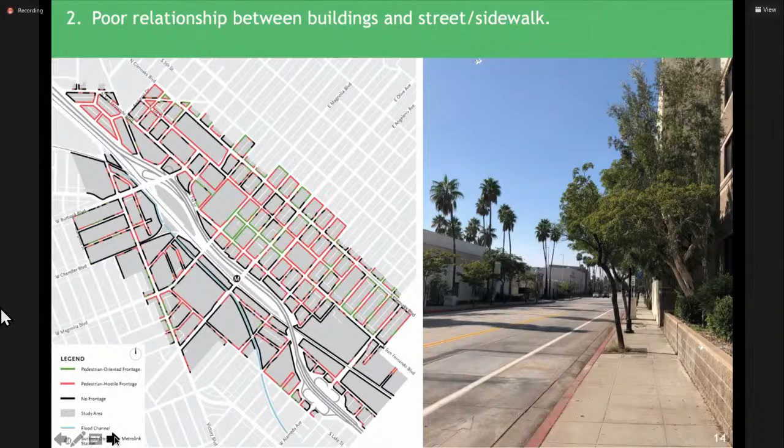There is a poor relationship generally between buildings and the street and sidewalk in places downtown. In green, you can see the few pedestrian-oriented frontages where buildings relate properly to streets and sidewalks, mostly along San Fernando Boulevard in the core of the current downtown. In red are pedestrian hostile frontages, mostly buildings that are very long and blank in relation to the street and sidewalk. In black are areas of downtown with no building frontages at all, mainly parking lots. You can see how much of this frontage in downtown is either black or red.

There is scarce open space and missing street trees. There's a deficiency in parks and beautiful streetscapes, as I've said before. There are robust parks to the north and to the west. There's only one coherent pedestrian-oriented streetscape of mature street trees, and that's along San Fernando Boulevard. All the others are either incomplete or not there at all.

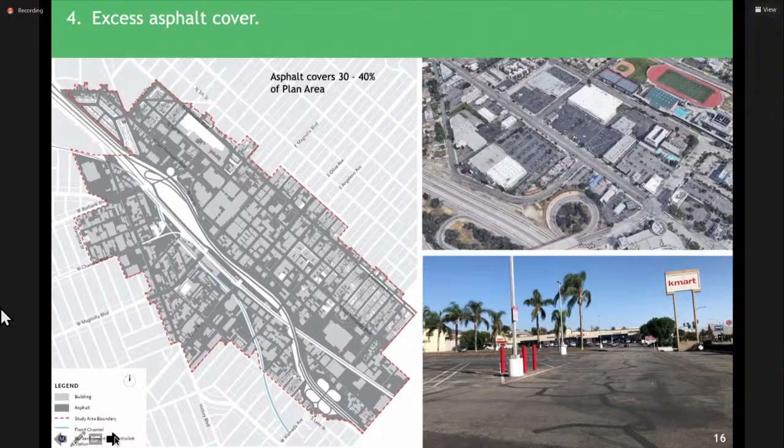There is excess asphalt cover. This is an important issue because there are environmental deficits that follow from this observation. Most importantly, asphalt covers about 30 to 40% of the plan area, either in parking lots or streets, and generates a heat island effect, which in the summer can raise the temperature by as much as 10 degrees and produce several adverse health risks due to air pollution that are measurable at 1,000 feet from the freeway and 300 feet from major streets.

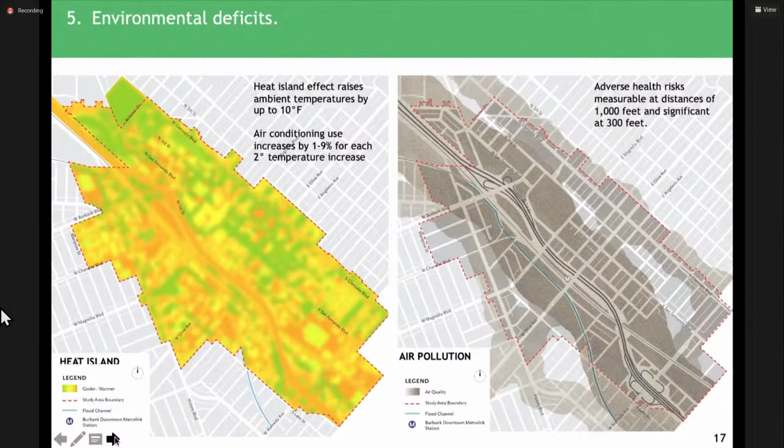There's also poor connectivity across the freeway. One of the key items in the specific plan design is going to be how to actually cross the freeway and connect properly, not only from one side to the other, but also to the Metrolink station.

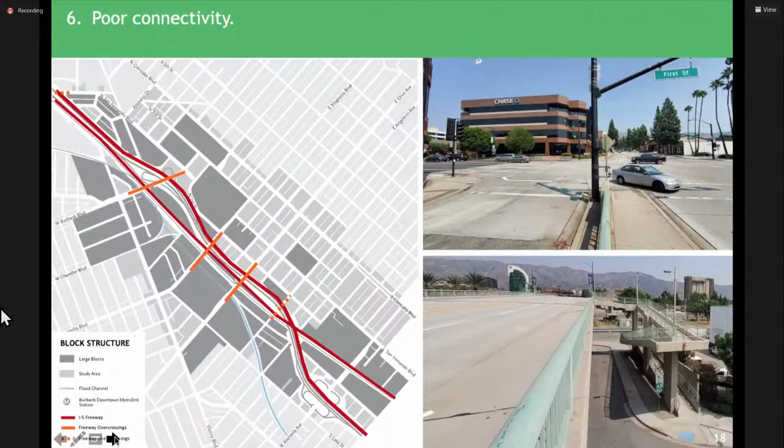Finally, the current code is outdated and confusing. It emphasizes commercial over residential uses, contains contradictory, complicated, and ineffective standards, and its floor area ratio basis causes unpredictable building form in relating new buildings to existing ones.

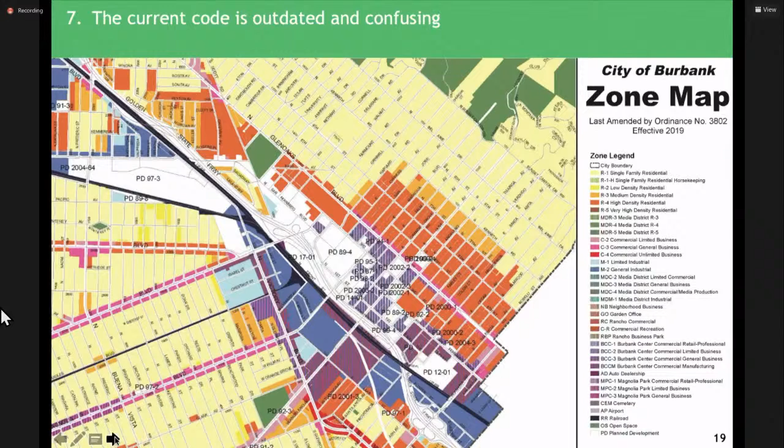But let's look now at the opportunities. There is, of course, no such thing as a place that does not offer advantages to consider in planning and design.

The three blocks of San Fernando Boulevard are the seed of a good downtown. The first of downtown's important advantages is that this shopping and entertainment district allows for the expansion of the location and the expansion of the new downtown. It is an excellent place to develop, very much in the heart and mind of people, as being the core of your city. It's an impression already very much in place.

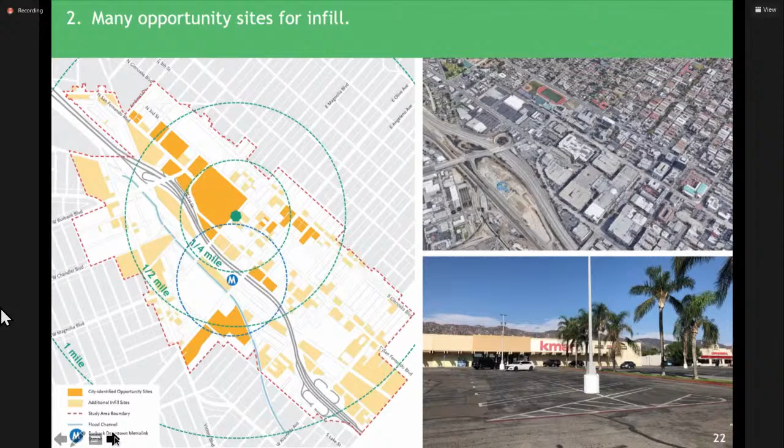There are many opportunity sites for infill. There are a number of potential development sites within the downtown, including opportunity sites identified by the city, and additional sites through the plan area identified by the project team. These can accommodate a very serious number of infill housing and mixed-use projects.

There is very high demand for future mixed-use housing. This is true in Burbank, as it is true everywhere in Southern California, but it's particularly true here because of the excellent position and location of the downtown.

The very wide rights-of-way on arterial roads downtown can allow for the transformation of the public realm. While they're a challenge on one hand, on the other they allow the possibility of restructuring streets in a way that does not impede parking or traffic, but generates a much stronger vision for the downtown.

So we've come to the point where we need you to help us vision the downtown, and we're going to need your input in assessing a number of planning principles or ingredients that we'd like to incorporate in the future plan. Based on the city's goals and the existing issues and opportunities I just described, we developed 15 guiding principles to help us with the preparation and implementation of this plan, and we'd like you to weigh in and tell us how important each of them is to your sense of how the future of the city should be determined.

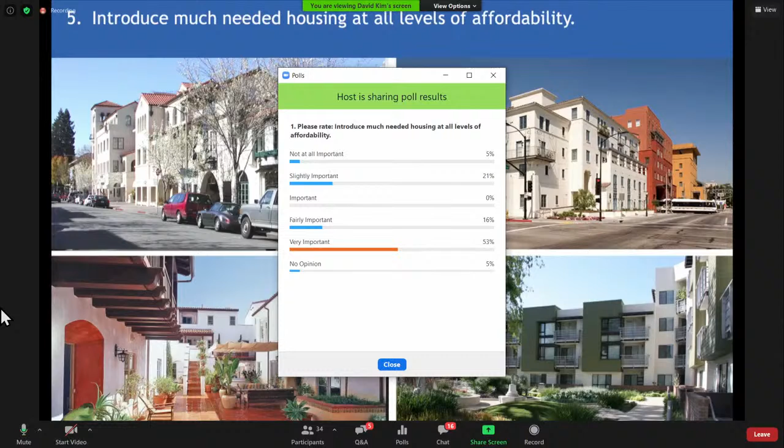Thank you all. Next slide, please. This is the last slide in the category of guiding principles called buildings.

Design mixed-use buildings with pedestrian-friendly ground floors, street-facing windows and entries, quality materials, and varied massing. As discussed in the analysis, buildings that present blank walls to the street generate a pedestrian-hostile environment, and large, flat buildings of one massing configuration can overwhelm the surroundings. The antidote is buildings that provide a friendly face to the street, the sidewalk, to public open spaces, and to their neighbors. Please give us your opinion on this principle as well.